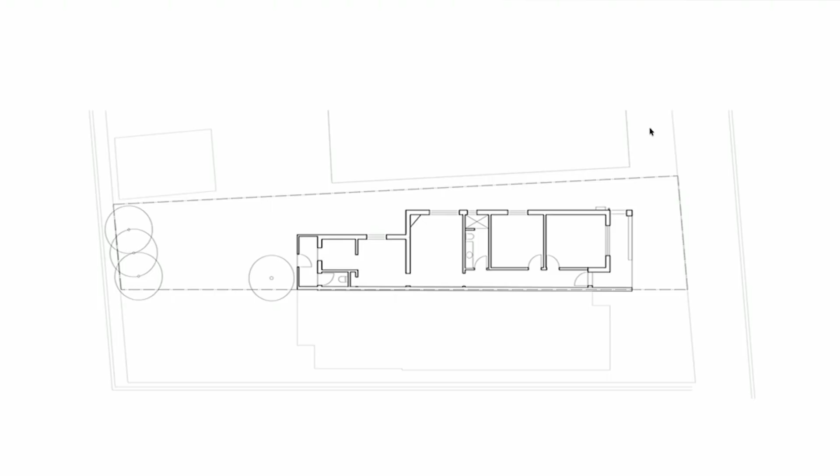The existing plan was a familiar inheritance, a linear sequence, one room after another. In the front bedrooms, this is fine - each room keeps its own door and has privacy. But applied to the living spaces, the same logic turns rooms into corridors. The more living space you provide to the rear, the greater the reduction in amenity.

So there were not too many places to go in terms of providing a different aspect to this garden that she wanted. The options available were pretty limited, but the typical options you'd run through always assume that you're adding space. When we looked at the floor space we already had, we were pretty close to fulfilling the brief. So we thought about adding a garden somewhere inside, then about giving a room over to a garden. Eventually the penny dropped and we realized we should take it further and just remove the worst parts of the house altogether.

And so subtracting was the least we could do. The removal of a superfluous, inboard, dark living space at the rear, outside the existing hipped roof, gave every adjacent room immediate access to light, air, and importantly, a new north-facing garden halfway along the home, the cost per square metre of which was a fraction to build compared to the other rooms. We'd created a new type of garden space for our client through the simple absence of building.

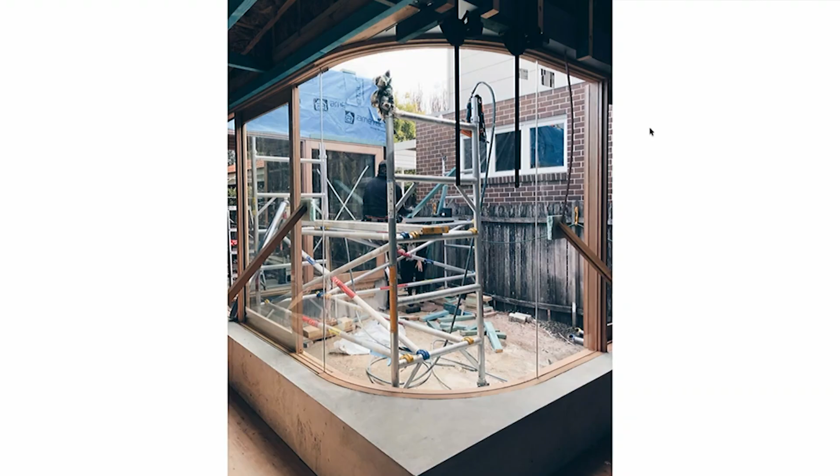The flooding controls that applied to the site meant that any new construction had to sit half a metre higher than the existing floor level. Existing levels were able to be retained where they were kept. And in order to avoid a costly process with the local council, we sought approval for this project under our state's complying development code. This meant that to work with a fairly restricted budget, we had to make use of the existing levels as much as possible.

The slightly stealthy retention of the lean-to allowed us to keep the kitchen space at the main living level. We then step up into the lounge room, which is the only portion of the build classified as new.

The removal of building to create the central garden meant that existing rooms were now exposed to flood, so we poured a large concrete retaining wall to capture the edge of the garden, which subsequently became a nice place to sit at garden level. And the living room, now raised, straddled the existing low garden to the rear, and a new elevated garden in the central part of the home.

That was the flooding mitigation, the bench. This is where the concrete bench reappears, our flood level bench. Here it's a seat or a place to lay in the sun. It's west facing. A service passage along the north boundary becomes a sort of fourth garden with stepping pavers and dracaena.

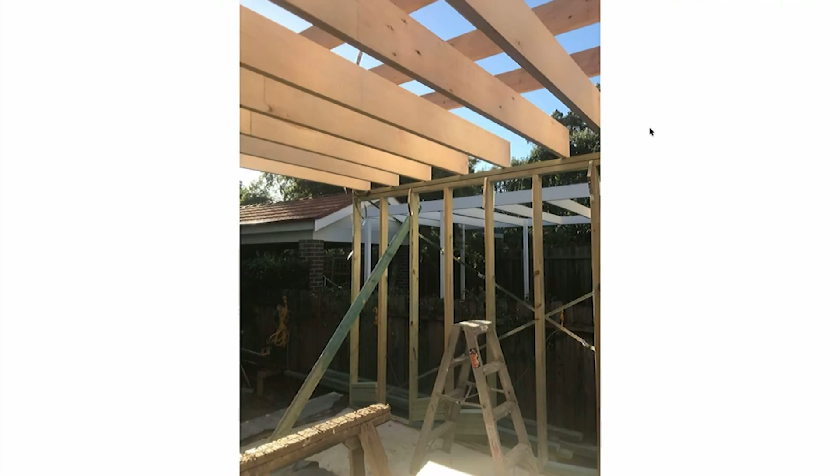Budget, another constraint, was met by restraint. Uncommon in most projects, but a testament to the trust, again, of our client. The economy in the project is in the economy of demolition.

We removed as little as possible, only the rear laundry, and kept the existing floor levels where we could. I think in the end we built four square metres of new floor space. We built only the necessary to keep costs down.

Materials followed the same logic, left raw and direct rather than dressed. The exposed timbers are standard pine LVLs, lovingly sanded by our builder, a New Zealander. The stamps were removed to celebrate the pine veneer, and the house reads as honest about what it costs to make.

But much of the real work was pragmatic: resolving rising damp in the brick portion at the front of the bungalow, running radiant heat throughout, and pulling light into previously dark interiors.

The new insertions and targeted removals borrow the neighbouring gardens, the dominant tree line and the open sky, framing a set of rooms to occupy within an otherwise suburban surround—a garden sanctuary with a house arranged to serve it.

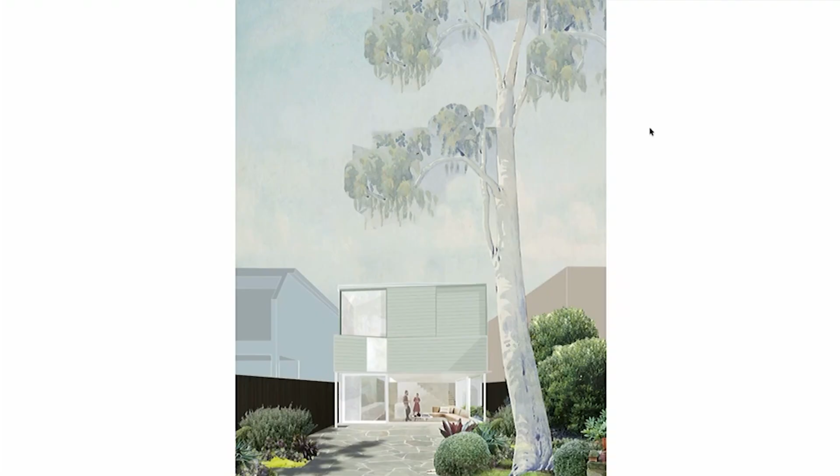A stone's throw from House for a Garden is another project of ours, Treehouse. We simply called it Treehouse because there was a 20-metre lemon-scented gum that rose out the back, in the middle of the backyard, visible from all of the surrounding streets, including House for a Garden.

It was a natural landmark for the area. Its massive diameter at the ground level shaped how our clients used the yard. It could be seen from nearly every room in the existing house, and it was immediately clear that this connection had to be preserved. Our clients told us that they'd bought the house with the tree and hoped that if they ever sold it, the tree would still be there, so its survival was preferred. So before we drew a single line, we had a rather sublime constraint to operate within.

The house was part of a modest remnant row of about 8 workers' cottages in Sydney, clad in timber weatherboard, with small DIY additions accumulated over the years, but at a polite scale with gardens that seemed unconcerned about boundaries.

The project began with long conversations with the clients as we came to understand their needs and routines, no different from any other project. We noticed neighbours dropping in for cups of tea and local kids turning up to play. We came to see the project as less about a closed family unit and more about accommodating a kind of village. So the idea of neighbourliness was of great concern for our clients.

It mattered a lot. The planning controls would have allowed a full demolition of the house, which, to be honest, was not in the best condition and considered for a second. But rather than an individual gesture in the row, they wanted to stay in harmony with the community. So the front was kept. Their concern for what happens beyond their own boundary was quite a noble starting point.

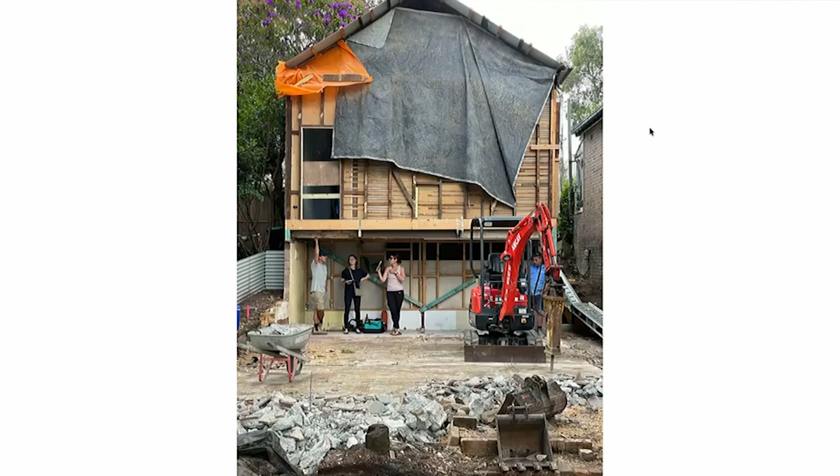The house itself was rather interesting. The workers' cottage featured the usual paradigm of 2 bedrooms in the front, flanked by a hallway on the side boundary that bled out into a sort of strange officey quasi-space. The site slopes from the street, and someone 40-ish odd years ago thought it would be a great idea to put all the living spaces in a 2.2 metre undercroft below. So that was our spatial constraint.

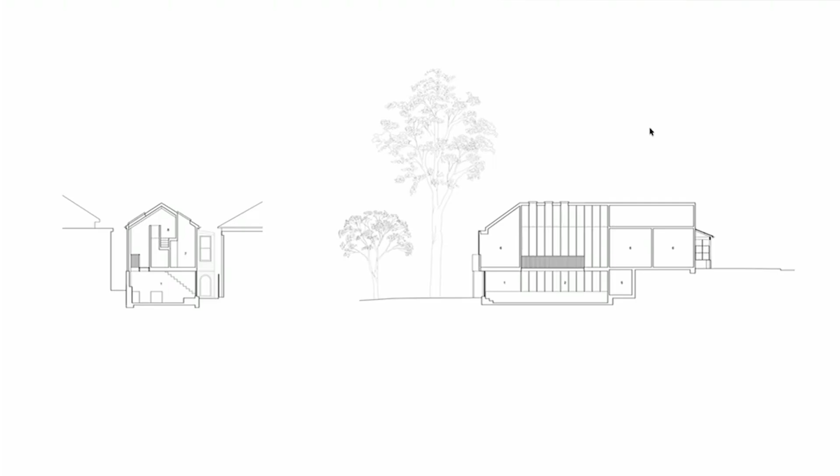The concept of the village, however, does descend a level of magnitude to the family unit itself. Each occupant had their own busy life at work or differing stages of school. Again, the words of Charles Moore became a guide for the approach: treat the home as a little village. Everyone can find their own space, but come together as a family as well.

In terms of metrics, the current situation was 2 bedrooms and 1 bathroom for a family of 5 with 2 dogs. And it was the hardest working house that we'd ever come across. When we finally started demolition work, it didn't take too much to knock down.

The requirement was that everyone needed their own space, an office for the parents, and as Moore states, a space to come together. And all of this had to occur between the retained front bedrooms and the massive gum tree in the back.

Formally, the design is simple. The existing pitched roof form is extruded towards the rear, stopping to match the rear alignment with the neighbours. It's within this envelope that we then carve out spaces to construct a street that connects all the new first floor bedrooms. The street is a slatted walkway of sanded LVLs.

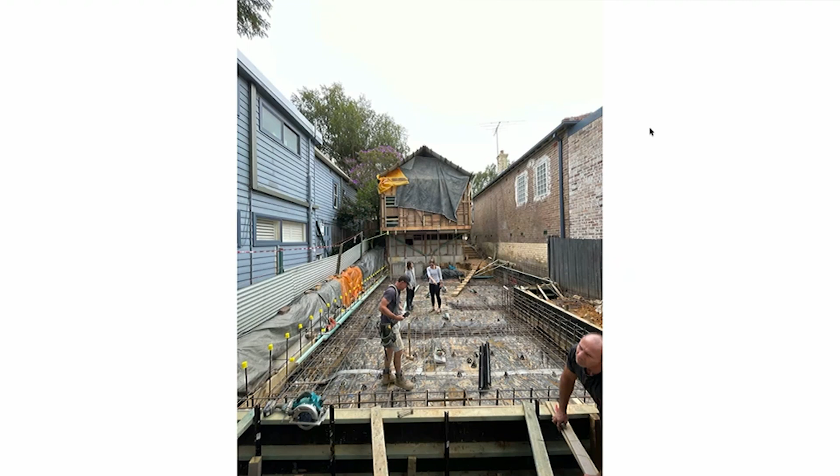The openness of the walkway was designed to allow light from skylights over, and that would penetrate all the way down to the lower ground floor. Rooms are carved out of the interior envelope to provide a variety of single, double, or triple height spaces.

To improve the height of the lower ground floor, we actually excavated downwards about 800 mil. This meant that our living areas were sunk into the garden, and when seated on the built-in lounge, you're surrounded by planting and greenery. The doors pull right around to open up fully on the corner, so in summer, you can feel like a shaded undercroft, more than a contained room.

The builder was found by the client at the recommendation of the local soccer club parents, and his and his team's main strength was carpentry, which we quickly discovered. Because of this, we embraced this idea of elevating the traditional timber carpentry details of exposed framing and tried to lean directly into their skills. We had vague ideas of what these balustrades and wall finishes would be, but they became much clearer when we met the builders, when we discovered what they were good at.

The project was halfway through construction when COVID hit, and we were suddenly faced with immediate impacts on material availability and costs. We felt the project survived this moment as it was essentially all on-site carpentry. We weren't reliant on too many externalities or suppliers, joiners, other fabricators, and the works continued throughout the pandemic, guys just chipping away in various corners of the site.

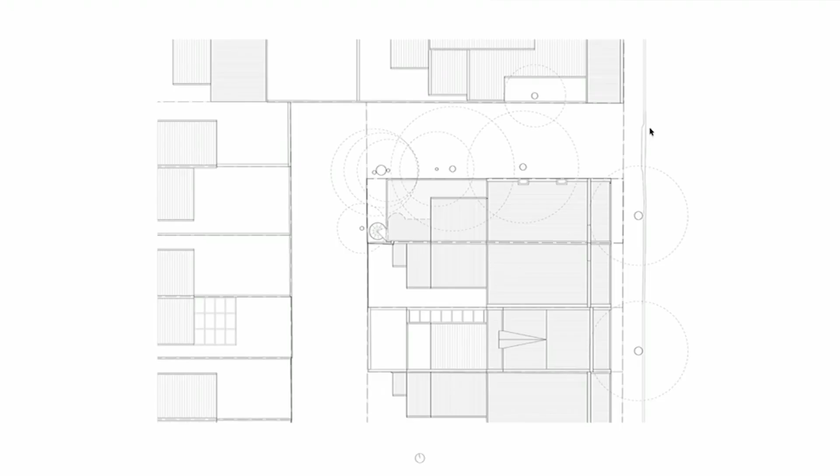The terrace was largely original in terms of its layout. It has the two good rooms, all these houses have two good rooms, to the front with a lean-to kitchen to the back. But in this case, there'd been a historic approval from the 1980s for a very large timber deck at the first floor. As an elevated private open space, this is very unusual, so much so that council spent a very long time checking that it had been legally approved.

But in this instance, the inherited condition was advantageous for us. Because of the extensive tree coverage around the site, this deck was very rotten and unsafe, but the amount of open space that it gave the home was incredibly unique, so we didn't want to lose that. Our approach was thus one of proposing repair and replacement, which we knew in reality meant complete replacement, but repair meant that council couldn't mandate its removal.

Inheritance is not necessarily restrictive. We often inherit good things in our projects, or at least we seek them out, and we find that these can become important touchstones that we in turn use to drive our own response.

There existed a very beautiful steel stair to the timber deck, which had been made by a friend of the owners, and the former materials of this stair really became important to making sense of the replacement of the new deck as a galvanized steel structure.

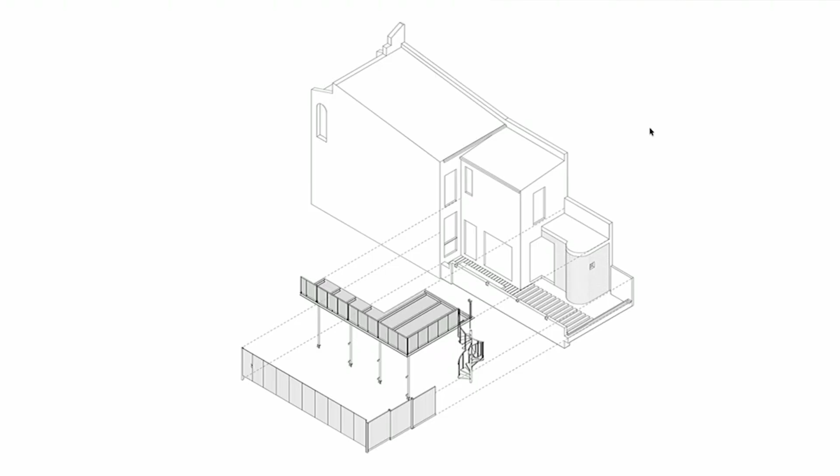The deck, whilst it gave a really useful sun-filled outdoor space, completely overshadowed the main living areas on the ground floor, and this is why we designed it as a very porous structure. The decking boards are 25mm square hollow sections, fairly generously spaced so that the living spaces below get this dappled light from above.

Council were quite adamant that the deck should be a like-for-like replacement. We find this sort of enforced heritage interpretation quite problematic, particularly when we're not necessarily dealing with beautiful or successful things. Maybe you can get from my tone that we encounter this a lot.

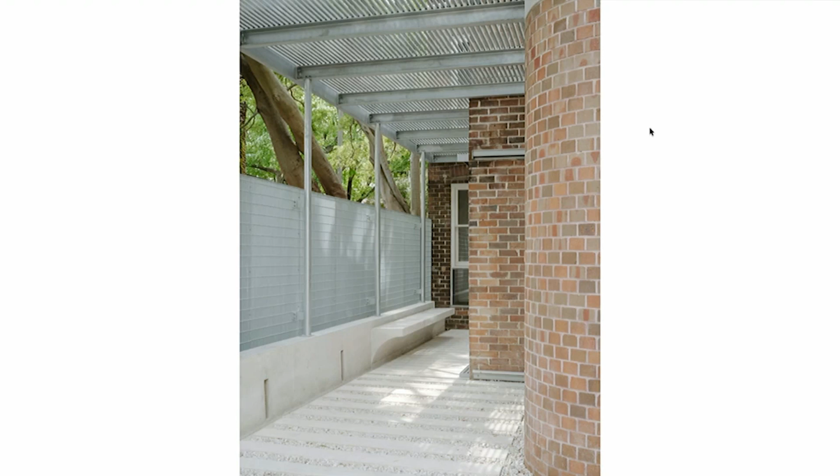The main priority we had with the balustrading was that we wanted it to feel like part of the deck, to create an object that would evaporate. This is something we'd experimented with in our own house where the mesh disappears, so you become more aware of the form of the deck rather than its volume.

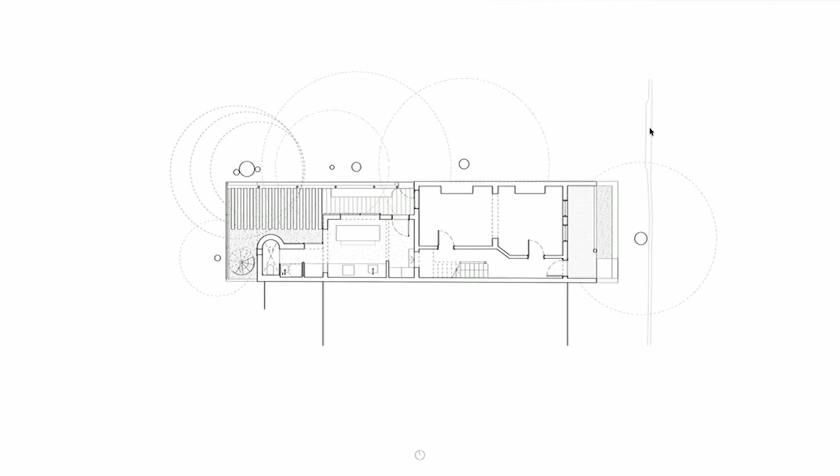In a lot of ways, this project is primarily a fence and a deck. We added 5 square meters to the ground floor at the rear to get the kitchen working with a washroom and laundry space. Because of the invading tree roots from the neighbouring laneway, there actually wasn't a lot of scope to be able to increase the footprint.

So we instead took an approach of borrowing width, or the sense of width, through the laneway and the side passage to get more light into the living spaces without physically building new area.

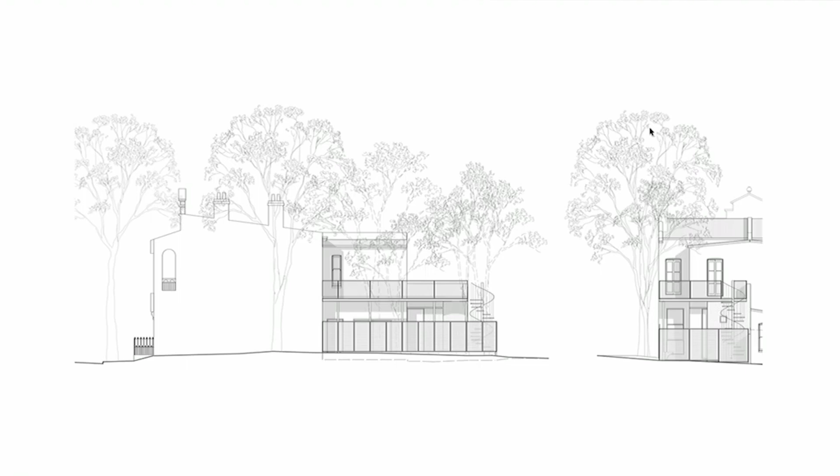The project is called Row's End because that's exactly what it is. It's at the end of the row, and we found ourselves again with quite a unique condition of being able to open up most of our side boundary to the northern light.

The rear and side boundary are all to a gated laneway that's shared by the neighbours, so we used an off-the-shelf Webforge grating to wrap the perimeter of the site. It appears quite dense when you're oblique to it, but then it sort of opens up and is transparent when you're standing directly in front of it.

It allowed us to borrow the space but still be resilient and robust to cope with the realities of tree matter and inner city living. I haven't included photos to quite describe the condition that we found this in, but it was sort of dissolving is how I would describe the building.

This approach to borrowing width ran through into the treatment of the new rear interior kitchen and living spaces. We maximised corner openings, which we've seen a few of already, to capture these typically rare oblique views across the site and living spaces.

I think this is about a 5-metre width. We always find when we're dealing with these narrow sites that we're wanting to try to get cross views through spaces.

We took an approach of celebrating and exposing the new structural requirements with the steel plate beams and window reveals, exposed in the same way that the original terrace and builders would have expressed their window lintels with arching brickwork header courses. We like that there's this sort of appropriated celebration of craftsmanship, which continues from the old to the new works.

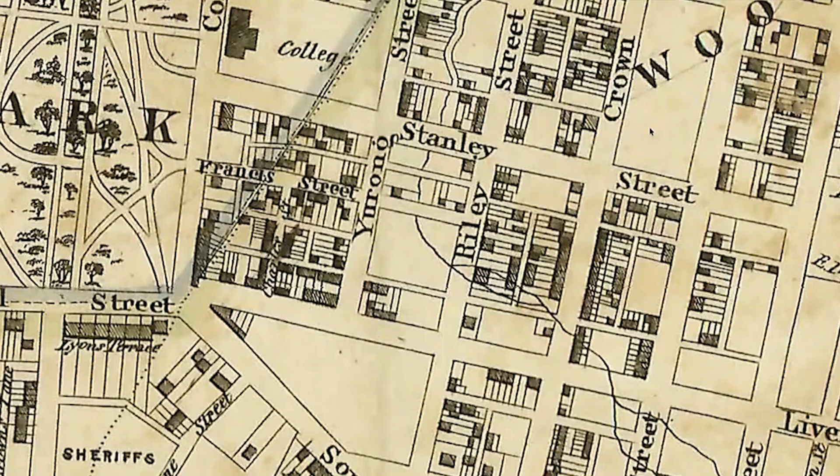The house we purchased was a sandstone cottage dating back to the 1830s, so it's quite old for Sydney, and it had an empty rear yard. The white was sort of the empty bit; the bit attached to it is the stone bit.

Historically, there'd actually been a cottage in the rear which had burnt down, and the site backs onto a rear laneway. When we bought it, the laneway primarily had garages onto it, but in the last ten years it's transformed largely in a similar nature to what we've done on our own site.

We thought the site was perfectly set up for a secondary dwelling arrangement, given all this. It's worth noting that the City of Sydney, our local council, has no minimum lot size requirement, so we actually managed to get approval for this as a subdivision. We didn't end up doing that—it's all on one lot, because a subdivision would have meant we couldn't do owner-builder.

And the whole project was basically governed by this sort of rule: can we afford it? No. Okay, let's not do it.

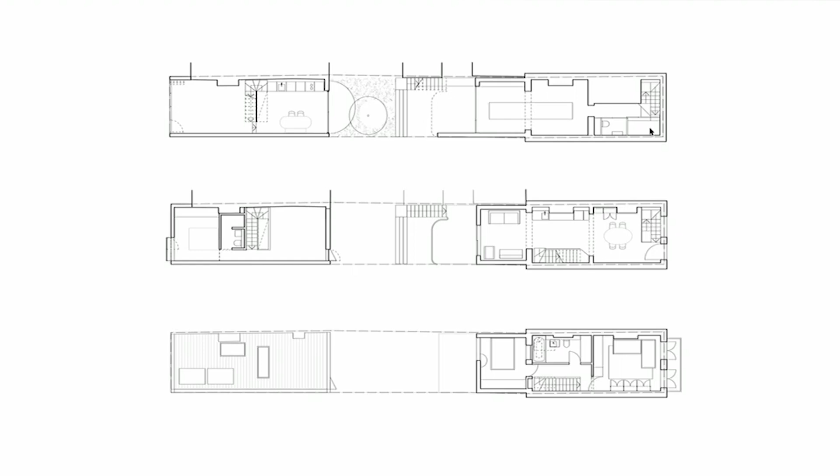The dwelling is divided in two, with our home on this side in the stone house fronting the main street. We introduced a stair right at the front door and a curtain which could conceal the house to get down to the studio space below. We ran the office out of here for five years and had two staff members down there until it just got a bit intense.

The back house, the new build on that side, is the steel house. It's a two-bedroom house with parking off the laneway. There's a decent crossfall on the site, which lets us gain elevation change between the two houses, which I think is actually what makes it work.

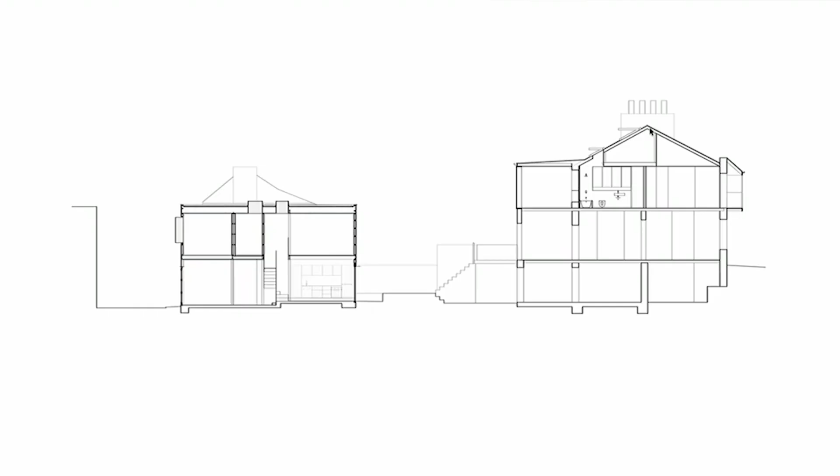As both architect owners, the construction of this project had to use the resources readily available to us. The only way we could afford to do this was the fact that we were the architects, so consultant costs were low, and we knew we had to do a lot of the physical construction and labouring ourselves. My father is a skilled welder, and labour costs—being probably the highest and biggest factor of construction costs in Australia—meant we leaned heavily into the ready accessibility to this trade.

We learnt pretty quickly that it was best not to intervene heavily with the stone. The walls are 500 mil thick in part, and it's all Sydney sandstone.

We painted areas in part to control the extent of sand which rains down, but also to brighten the sometimes pretty cave-like interior. All the new interventions are timber elements, painted framing, lining boards, in part to work with the character of the original materials, and in part because we found we could do this. Lining boards were easy to paint and finish. It's basically a one-to-one basswood model making exercise.

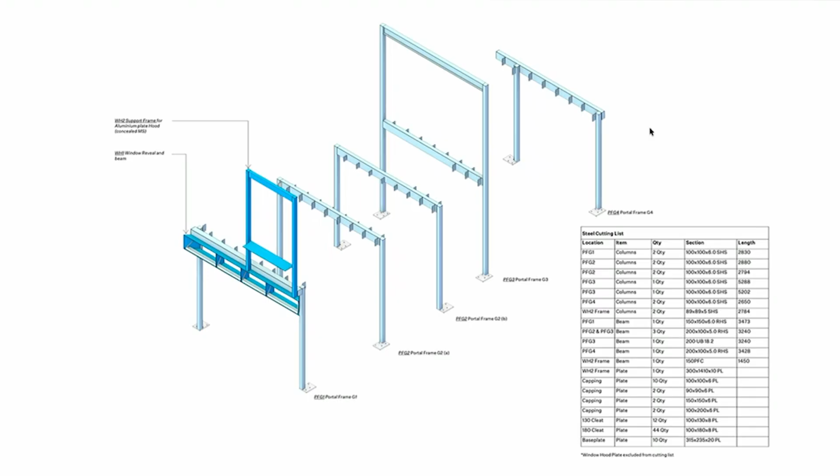The new house at the rear was designed as something we thought we could build. The main structural frame of the house employed a steel structure. Window details were resolved with plate steel. Stairs and walls within the new house became steel, which was all shop drawn and ordered, cut ready for site welding.

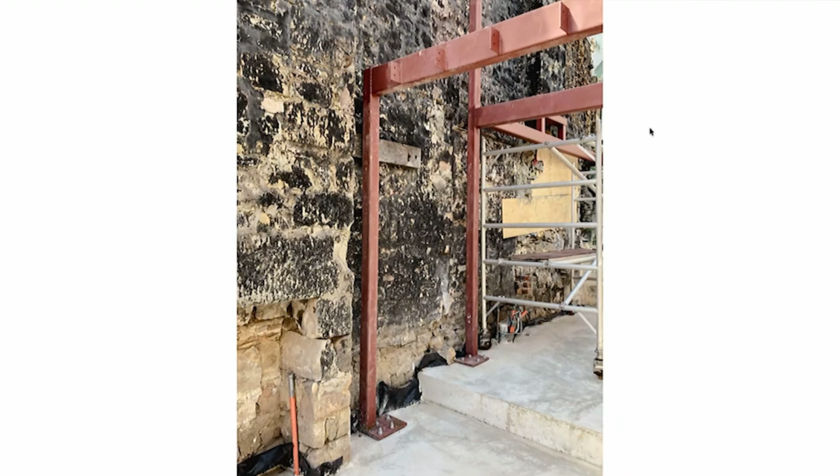The boundary walls used the original stone party wall on one side. It was there, we didn't have to build it. And on the other side, it was masonry to achieve the required fire rating. Every decision was very pragmatic.

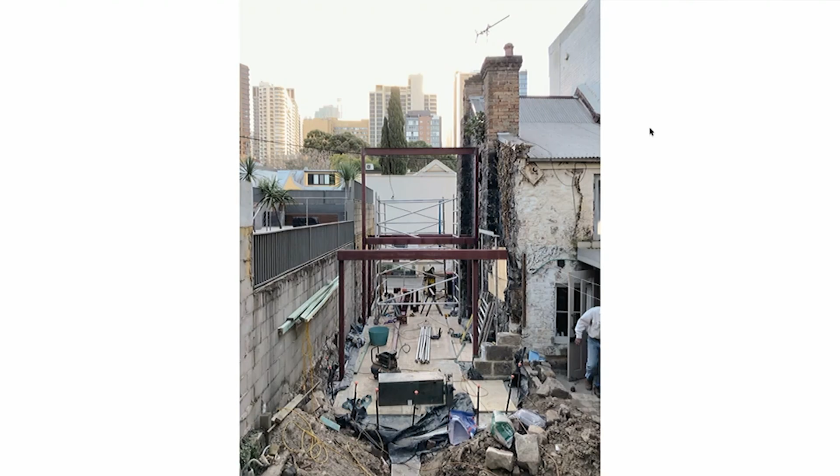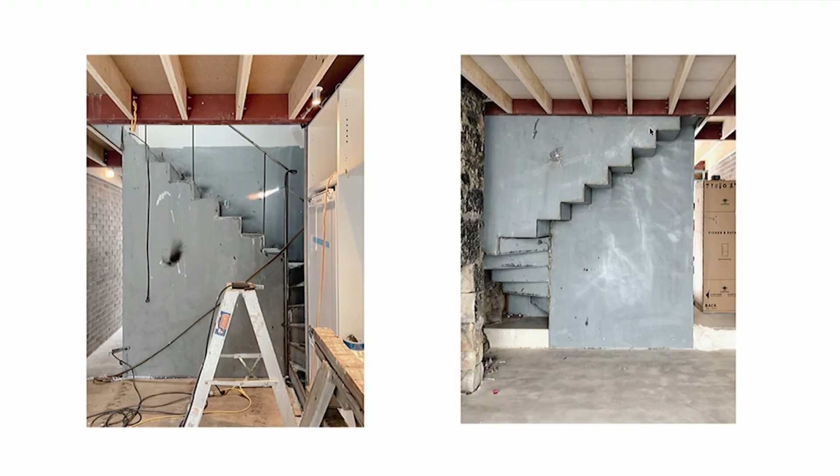When relying on a family member for a skilled trade, the results can be faster and looser than you may accept for a client. It allows, though, for spontaneous shifts and changes. With a material which is usually planned out well before arriving on site, having the makers on site meant that geometries did change, elements were ground and cut as the practicalities of installation came into reality.

This project taught us a lot in terms of construction. I think, unfortunately, there is some truth in what you learn as an architect building your own house. So unfortunately, very expensive though.

We would shop draw what we could. We had this staircase cut and bent. Again, it was a space-saving exercise in avoiding stringers and having a site welder available. This makes our thinnest wall 6 millimeters to counter the 500 millimeter walls of the stone house.

6. That was 6? Yeah. I feel like that was my dad again saying he wasn't going to lift 10.

The last element of the project, the idea was that the stair would become this sort of white painted element at the center of the house, which would just bounce light down from a rather large skylight above.

The last element of the project was the construction. There's Dad. Look, he's even doing—

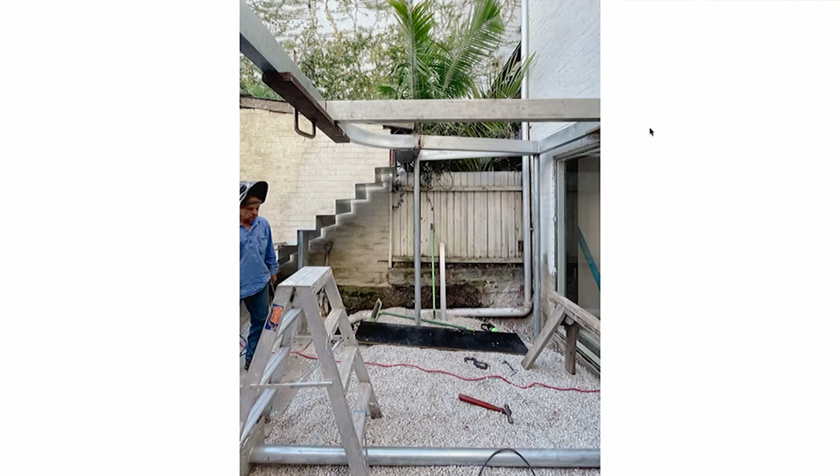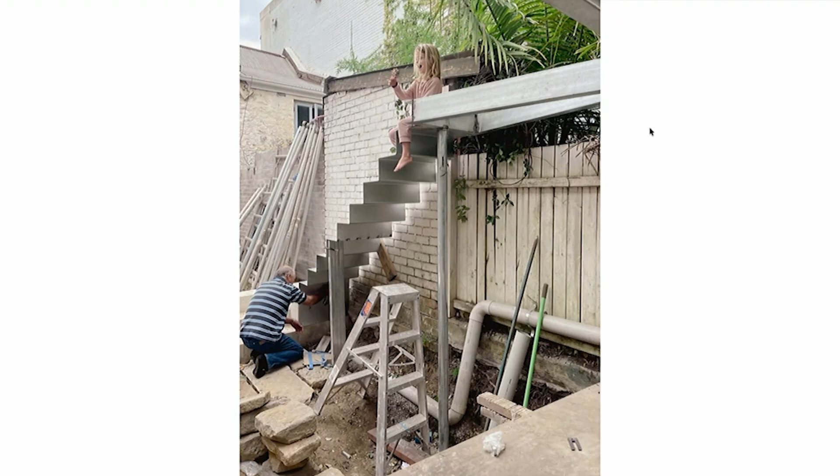The last element of the project was the construction of a steel deck appended to the rear of the existing stone house. Envisaged as a diaphanous structure, its transparency was important given that our studio was below it, and so we were going to spend a lot of time looking at its underside.

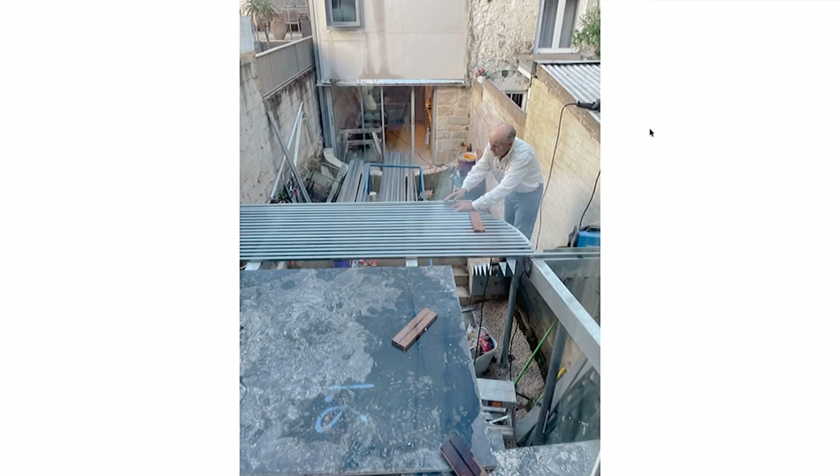This is where we tested what a steel decking might look like, and we trialed everything from perforated sheets to agricultural expanded mesh. In the end, this was the first use of the square hollow sections, and actually we used our furniture to gauge exactly how wide we could go before the chairs would fall through.

We drew the shape of this and had it bent, but all this was chopped and tweaked. It was very much a feel-it-out process, which is only possible when you're doing something yourself. The last iteration of this deck at Rozelle was completely shop-drawn and it used bolted connections.

It's a 'do as I say, not as I do' situation. It's still an important ethos in architecture.

A folded steel plate stair is tacked onto this deck. We asked the engineer how much support this might need. We ignored him at first, and the whole structure had a bit of a wobble, but it was quickly remedied with a small connection back to the wall of the original house.

The garden space, which is actually one of the only mandated areas from council—you have to have 16 square metres per dwelling—was used to buffer all these different activities on the site. We maintained the existing garden level at the centre, so it's actually raised in part. This meant when we're sitting in the lower ground office, we weren't staring into the dining room of my sister's house. When you're up on the deck and living room, we in turn look into the canopy of a newly planted tree.

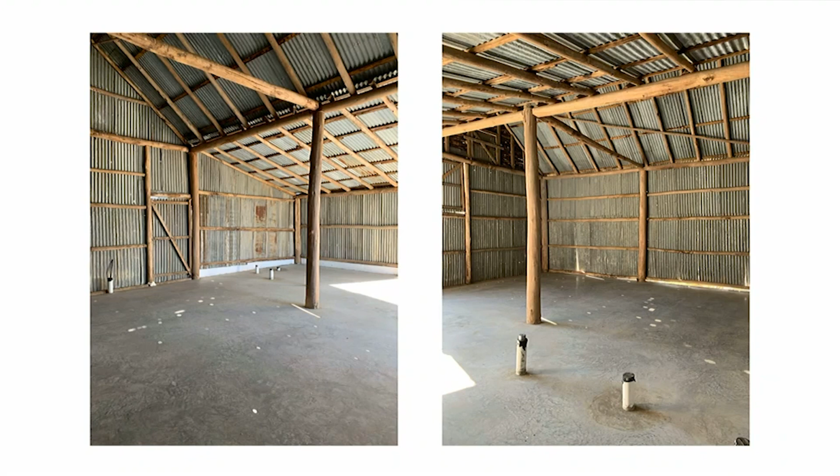Yeah, we thought we'd head away from our usual urban setting to a rural site this time, but with the same encountering of inheritance and necessary intervention, and a demonstration of approach.

The idea was to create a house in an old agricultural building. These structures, which are dotted around the farms of Australia—and they're likely pretty similar in New Zealand—are beautiful to us in how direct they are, in their necessity: hardwood timbers, undressed, still showing the size of the tree as they were when they fell, with simple veils of corrugated iron.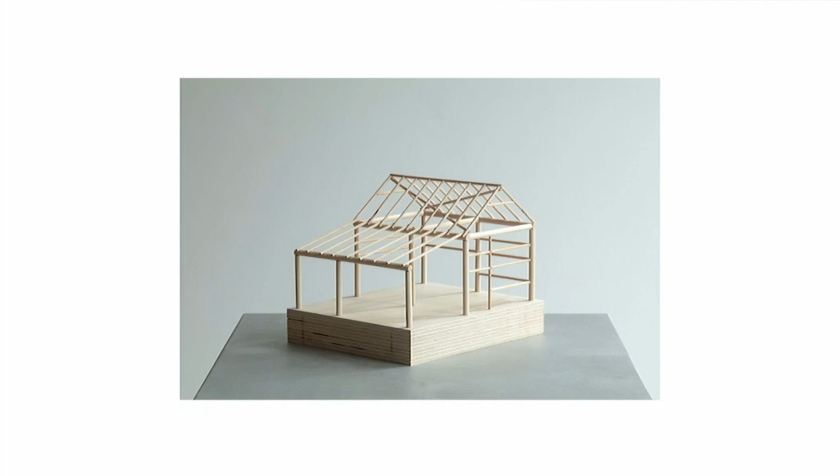For us, this sort of project exemplifies the idea of how little one should intervene. Although not to code, we fundamentally have a structure. The idea of transformation to a home is really about a division of space to reflect the differing functions that are now required, and improving or actually creating a protective skin.

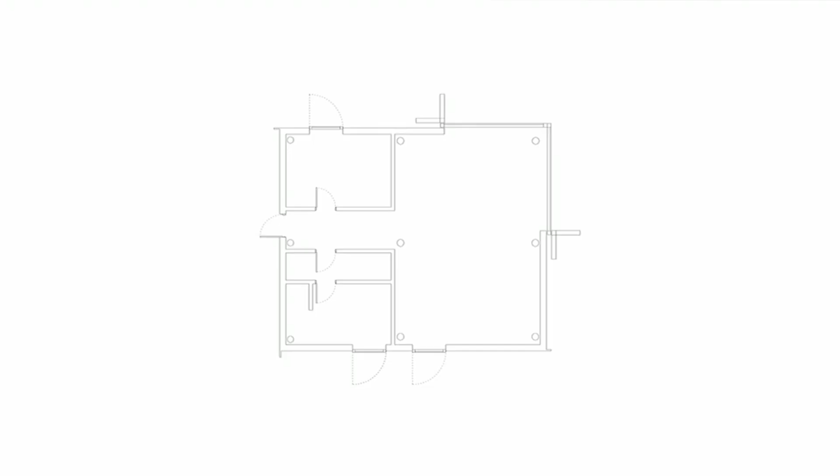A structurally insulated panel clad the outside, a new skin to the old bones, effectively independent of the timber frame. We considered the idea of enveloping such a building as a way to use what we inherited. Whilst wonderfully remote, this is not so wonderful for trades and materials.

So we looked at what materials and makers were readily available, namely agricultural steel sections. I think we must have listened to Dad, because we were looking at Duragal. Whilst this prefinished product doesn't allow for much variety in sizes compared to standard steel profiles, we embraced the oversized nature of the profiles to work with what they make.

This felt commensurate with the ruggedness of the place, and realistic in terms of who would be constructing this. The windows and doors were not made with purposely extruded aluminium sections. Instead, like our back doors, we used RHS steel sections in a factory with welders who usually fabricate sheep runs and fencing. It was a deliberate choice to work with materials that they would know.

To come back to what we saw in Lewerentz, the brick choice itself was almost predetermined—what was done with it wasn't. What we inherit—the fabric, the budget, the controls, the builders and trades who happen to be available—is not necessarily the obstacle, but actually part of the work itself.

This is our approach. It's not particularly novel or inventive, but for us it feels appropriate. We think appropriateness is what allows us to work honestly, to make houses which belong to their place. They belong to our city, our neighbourhoods, and ultimately they belong to our clients who live in them.